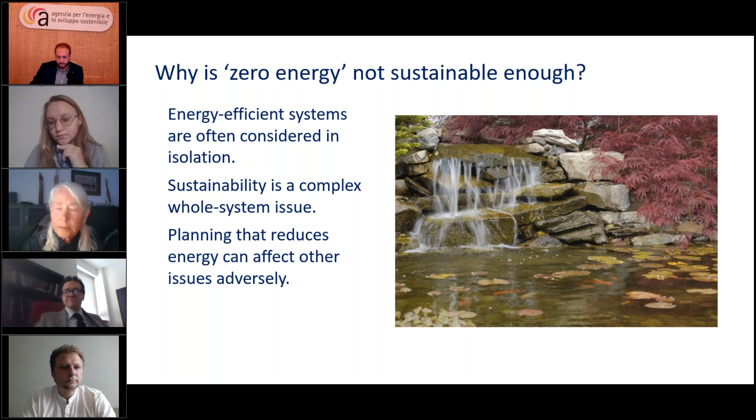I think we have a problem with your audio. Did you launch the recording, or are you trying to speak? Sorry. Can you stop that? We cannot hear. We're going to launch it. No, we cannot hear. Okay, I thought that would work better. I'll see if I can.

I'm going to talk about what I mean by beyond positive energy districts.

Some recent zero energy district plans seem to focus on energy in isolation. Single function planning can lead to bad decisions and designs if they do not recognize interdependency and potential design synergies. For instance, an energy or carbon positive urban district could still be lacking in environmental and life quality, social opportunity, or even direct access to the means of survival.

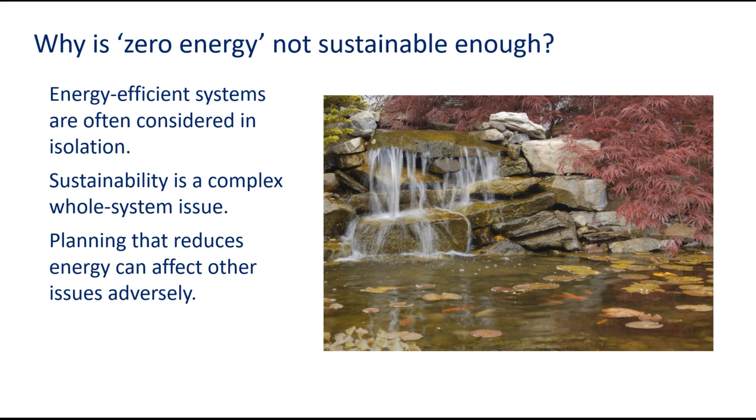Efficient energy systems can have harmful sustainability impacts. Even renewable energy could reduce sustainability by discouraging passive design or encouraging sprawl or over-densification.

We can do better. But today, planners are busy trying to respond to problems created by past planning policies, acts, and omissions. For instance, cities once designed for the convenience of cars created huge sustainability problems. But the equally car-driven strategy of just making cities inconvenient for cars created other problems.

If we cannot provide public transport, perhaps instead of just reducing the number of parking spaces, we could design multiple uses of spaces that produce energy and other public functions and benefits.

So it's not enough to mitigate the threats planners and politicians created, such as resource depletion, climate change, sea level rise, urban congestion, and expansion. Planning should proactively increase the social and ecological life support systems.

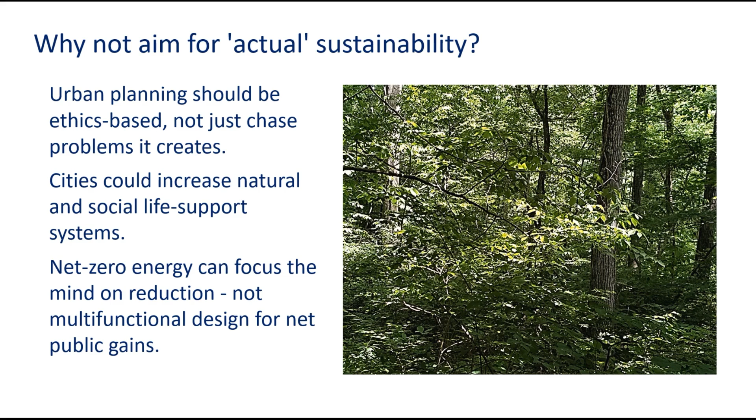Concepts like net zero energy and carbon focus the mind on reduction. Development must also create multiple positive public gains to even begin to compensate for their unavoidable land use, material flows, and pollution, until we learn to design net positive cities.

We need to revisit sustainability. The term has continually been watered down. Early international declarations often included the idea of proactively keeping future options open. That meant avoiding irreversible pathways such as nuclear waste, deforestation, or other forms of ecocide.

There was backlash in the 1970s to limits to growth arguments. However, after the seminal Brundtland Report of 1987, the technocratic professions, industry, and government bureaucracies adopted this view. So when they captured sustainability, the term was weakened to mean just lasting longer.

We're still talking about allowing growth up to its ultimate limits or negative tipping points, like increasing temperatures by 1.5 degrees or exploiting only two-thirds of the Earth.

Cities can solve many sustainability problems. Positive development theory argues that built environment planning and design can increase our natural and social life support systems in real terms, beyond zero. Planners have always been concerned with sustainability, but most have only very recently included nature along with

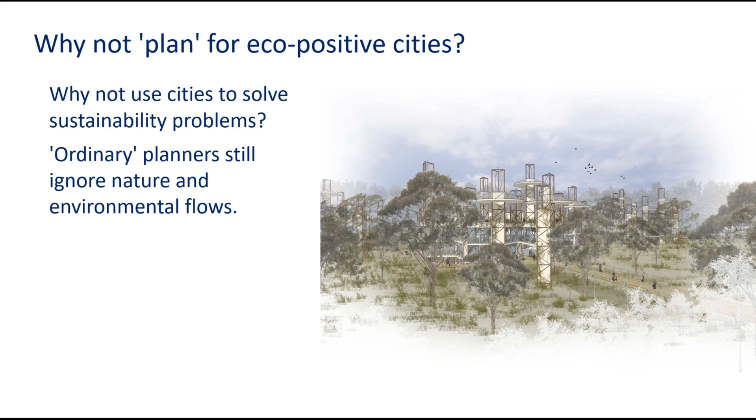human-centered environmental, economic, and social issues. For instance, past sustainability plans often only concern water flowing into and out of their district boundaries, not the whole river system or catchment.

So-called sustainability plans perpetuate ecologically harmful development patterns by focusing on just energy and short-term economics. For example, urban densification can save energy, but overly dense cities are hard to retrofit for climate mitigation, renewable energy systems, or new technologies like airborne taxis, let alone basic human needs such as environmental security, water, oxygen, contact with nature, things that are often left to the market.

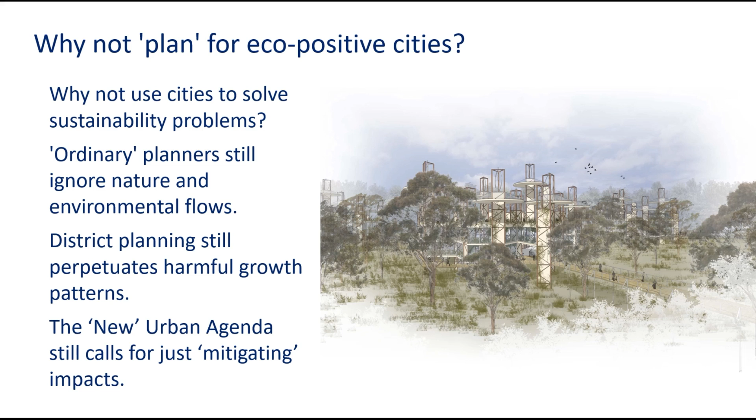The recent international effort, the New Urban Agenda, had nothing new in it and called for more sensitive urban growth through both urban densification and expansion. Reducing impacts on nature, or even restoring nature, is not increasing nature.

Why not use structures and buildings to solve, not just create, problems? Green design in the 1970s was about creating healthy, passive solar, low-impact, and nature-friendly environments. However, the aim was mainly energy and resource autonomy, not meeting public needs and benefits.

Then, when the Green Building Councils emerged in the 1990s, the focus became limited to efficiency, reducing waste energy and materials to save developers money. But this did not save nature or build community. It may have been necessary back then, but the efficiency standards remained largely relative to bad buildings.

Gradually, green buildings became associated with efficient but mechanistic, reductionist, or technocratic design. Consequently, new terms were used to reclaim sustainable design, like regenerative. Resilience, or the ability to recover through restoration, revitalization, and regeneration, ignores the global decline of justice in nature, so green design is unsustainable. So far, green buildings have had a huge opportunity cost.

Both planners and designers have left problems of social inequities and nature destruction to politicians and others, so what could go wrong? Most green buildings leave the poor and nature worse off than no building at all.

The damage that both ordinary and green buildings do will last for decades. Sustainability will require that green buildings be retrofitted to a genuine sustainability standard. However, since most buildings are not designed for adaptability, they'll cost too much more to upgrade.

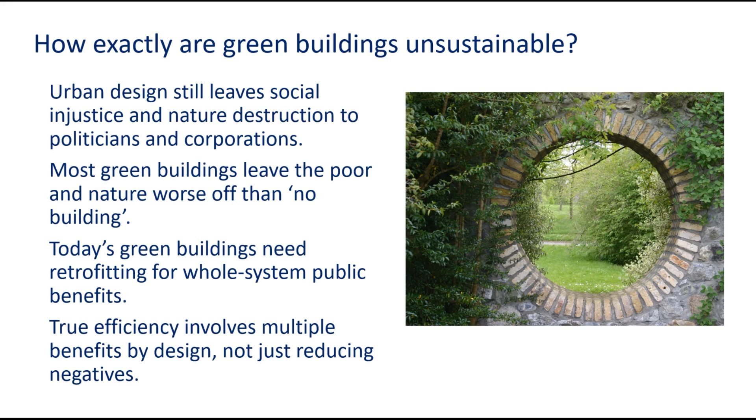Biophysical structures must be net positive to compensate for past errors. Net positive outcomes means going beyond negative system boundaries like property lines, tipping points, legal liability, or even supply chains. People now recognize that buildings impact every sustainability issue. They drive material flows and impacts in myriad other industries. Therefore, despite their humongous material flows, cities and buildings could have positive system-wide impacts, not just help us screech to a halt at the cliff edge.

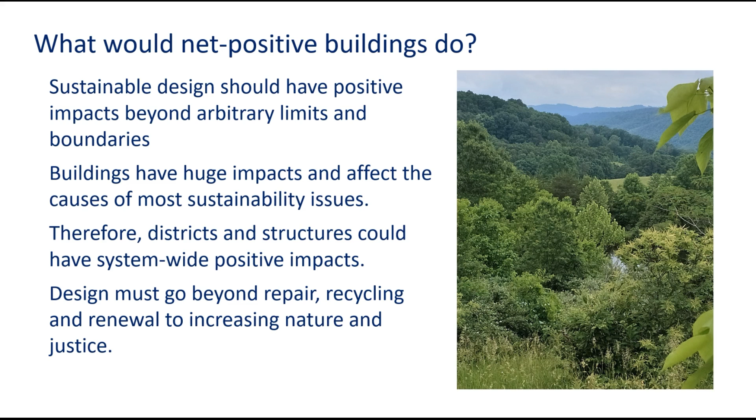But we need to go beyond repair and renewal to actually increasing nature and justice. Is this happening? Many big companies are now advertising nature-positive goals. That includes impacts on nature, not just resources. Many developers and manufacturers now recognize that sustainable design can save resources and restore on-site nature and protect occupant health while costing less. However, although many use life cycle assessment and count supply chain impacts on nature, they largely only aim to restore the damage that they themselves are adding.

Designs that are eco-efficient by using minimal energy and resources, or eco-effective by closing resource loops, or even nature-positive by restoration or offsetting, are usually only circular. Circular systems will be more economic, but in the global context of accelerating disparities of wealth and biodiversity losses, they're only remedial. That is, reduction, recycling, regeneration, renewal, and other actions to increase nature's resilience to assault are essential, but not net positive. Sustainability is a design problem.

Sustainability requires multiplying positives by design, not just deducting negatives. So sustainability is too important to be left to politicians, corporations, markets, or even demonstrators. Each can do their bit, but they'll never do enough. Sustainability does not require financial or personal sacrifice, but current power-based decision systems are geared towards sacrificing the underprivileged and ecosystems. So systems redesign is necessary.

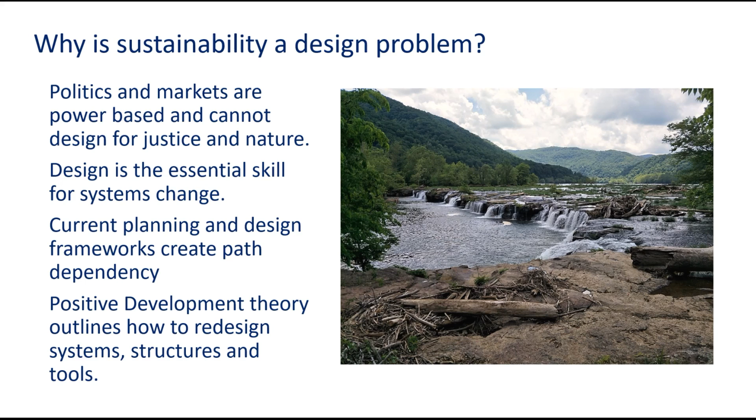Positive development theory outlines why and how to restructure institutional, intellectual, and physical systems to support net positive sustainability, so it turns the existing models, methods, metrics, and mindsets into sustainable design on their heads.

So net positive means more than recovery, renewal, and resilience. It means increasing nature, not just greening the spaces left over after development, and increasing environmental security and equal opportunity, not just privatizing public resources and nature in mansions or luxury goods more efficiently. The word net signifies a whole system global framework, not just outcomes within arbitrary limits such as building, site, or district boundaries. If people keep changing the meaning and standards of net positive to mean just better than the norm, then there will be no word for genuine sustainability.

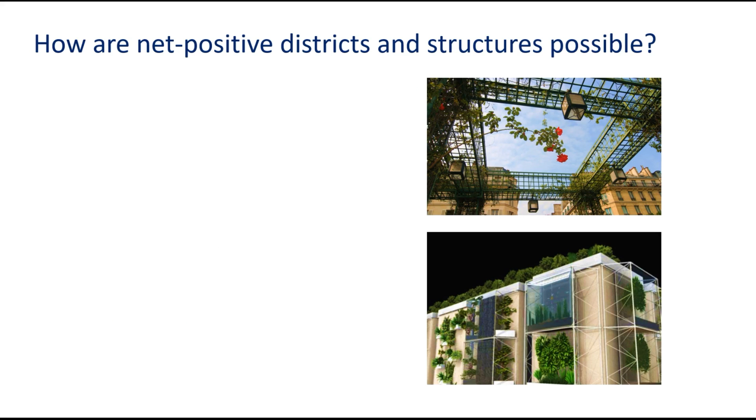Merely regenerating the remnants of nature, making nature more resilient, or making building stakeholders happier and healthier will barely slow down the rate of planetary destruction. Buildings are composed of manufactured products that, until recently at least, were almost never net zero, so it's hard to imagine net positive. But many forget that buildings have a spatial dimension.

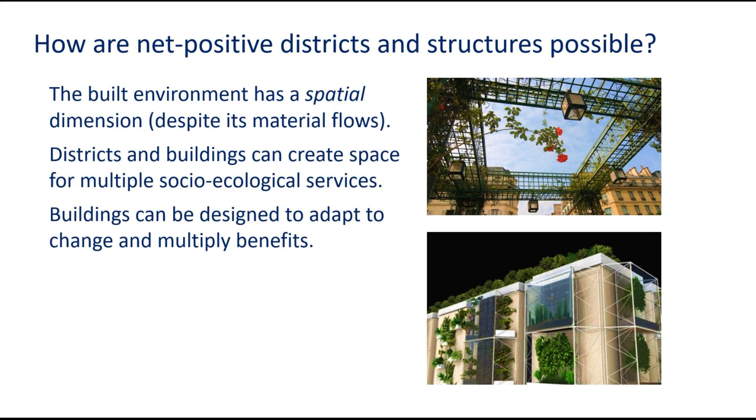Urban structures can create space for social interaction, multi-purpose shelters, biodiversity incubators, natural passive systems, and other things that in combination can create net gains. Multifunctional spaces and structures can be designed to adapt to social and technical change, such as using modular systems. They can increase future survival options and opportunities through diversity.

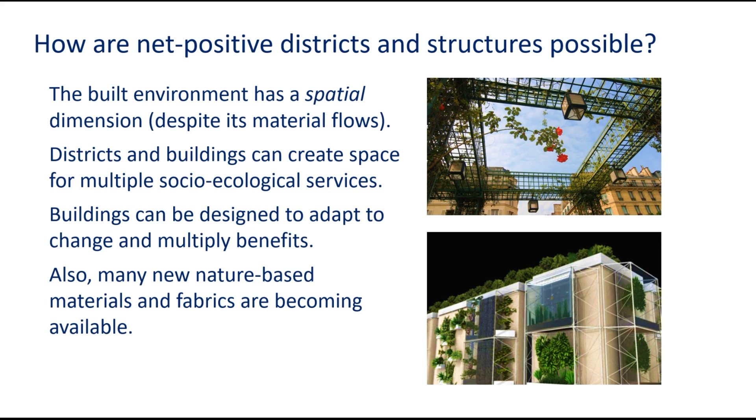But new construction and furnishing materials are also available. 3D printed buildings could, for instance, use hempcrete, bamboo, or local agri-waste. But mycelium-based bricks and boards do not take as much land to grow. And fabrics for curtains, furniture, and carpets, and even building energy could be produced by algae-based systems.

Net positive buildings can blend in with any ecosystem or cultural tradition, just like passive solar design can, or it can be largely invisible. Metaphors help the imagination, so you could reconceive cities and districts as like reefs in an ocean that nurture and reseed their bioregions. Buildings could be reconceived as garden resorts for everyone, that is, gardens for living instead of machines for living.

No projects are certifiably net positive because the claims are not properly assessed, but some projects are currently being assessed with the Net Positive Design app, which I'll discuss soon.

So what would the test of a positive development be? Well, it must benefit society and nature in real terms. Therefore, it would measurably increase the ecological base, or be nature positive, increase the public estate, or be socially positive, and increase future options and opportunities. But moreover, if possible, development should overcompensate for its share of existing negative regional or district social conditions beyond its own impacts.

So let's look at what constitutes beyond a project's own ecological, social, and economic impacts. Ecologically, net positive design would increase nature beyond pre-urban or pre-industrial conditions for genuine security as well as life quality. That means not merely regenerating what's left on site or offsetting it by preserving what's left over elsewhere or conserving a fraction of the earth.

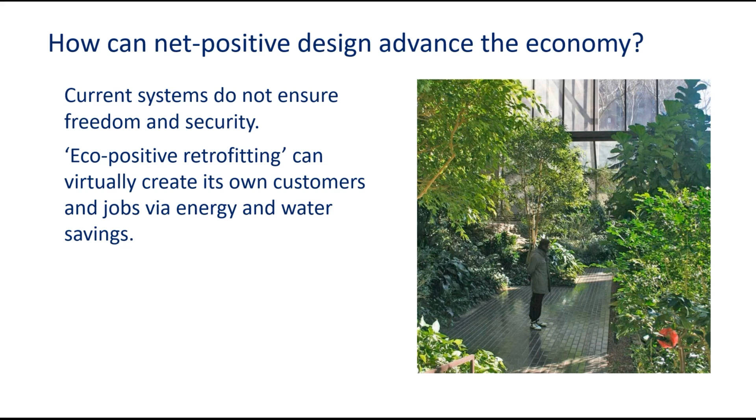Emergency shelters, vertical urban farms, community recreation facilities, and so on can be designed to provide multiple public functions and services.

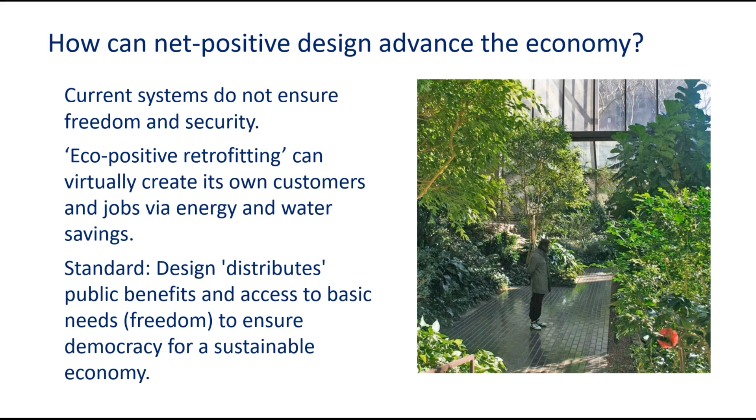So the standard is design that distributes public benefits for economic efficiency and access to basic needs for freedom to ensure democracy, which a sustainable economy requires.

So in summary, the logic behind positive development is in part that sustainability requires environmental justice, equal opportunity, and nature. It requires a different open system design paradigm based on a new sustainability theory and practice, which entails new intellectual concepts and frameworks, and requires the integration of decision-making with design, which requires the redesign of systems of governance.

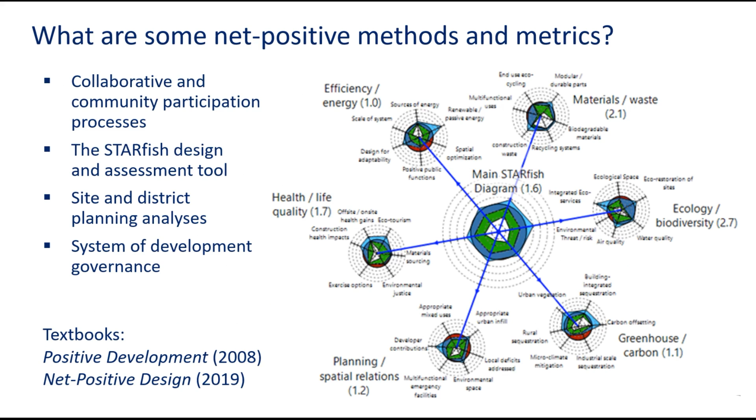By governance, I mean checks and balances to prevent the abuse of power. So we need to design checks and balances between corporations and government. Positive planning and design processes and tools are summarized in two textbooks, Positive Development 2008 and Net-Positive Design in 2019.

The free Net Positive Design app called Starfish is unlike other tools. For instance, it calculates remote and cumulative impacts in real time as the design evolves. The tool has embedded instructions, as does the book, website, and video, and one can ask questions about how to use it on the website.

24 major differences between the Starfish and green building rating tools are explained on the website and publications. For instance, Starfish sets benchmarks relative to genuine sustainability, whereas most tools only assess improvements over typical buildings, practices, or site conditions, which is the distance from unsustainability.

Tools do not measure beyond zero, so net positive impacts aren't really assessed or measured, although some tools cheat and count reductions in negative impacts as positive. The Starfish distinguishes ecological environmental impacts, whereas many tools give ecological points for less bad indoor environments.

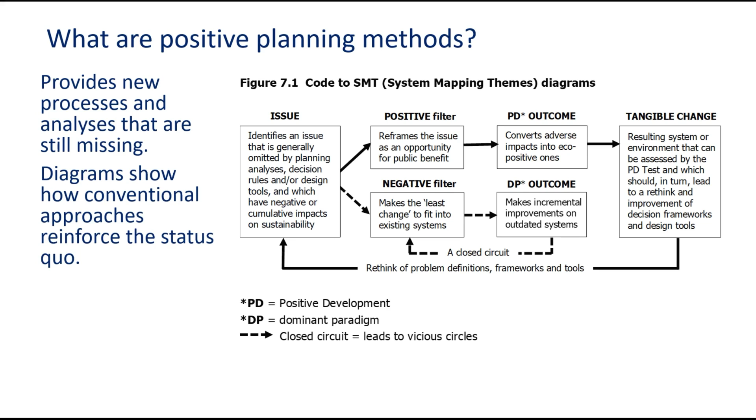New planning methods include genuinely participatory sustainability processes and a set of planning analyses for urban design that are still missing from both theory and practice. These diagrams that accompany the text suggest how conventional approaches reinforce the status quo. These analyses, depending on project size, can be conducted as a simple community mind mapping exercise or as big data analyses by experts. These analyses will be included in the STARfish tool as a satellite diagram or a standalone diagram to guide net positive planning.

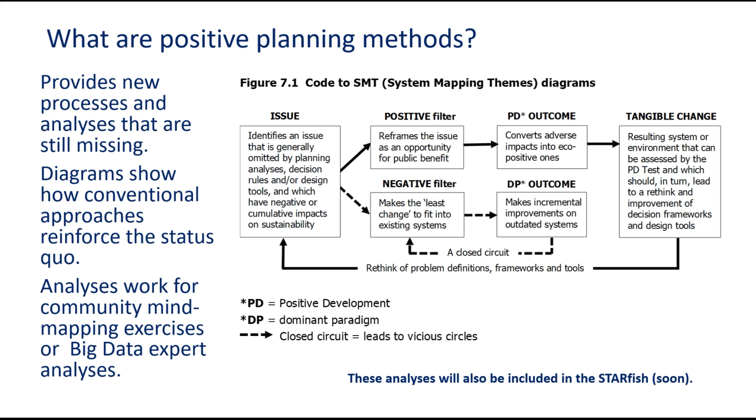I'll only have time to show the outline, but I'll put a video summary on the website for those too busy to read. Some of these analyses concern energy systems, but they focus on how these systems can increase sustainability values, such as human rights, security, and freedom.

These analyses concern different stages of the design and planning process, and I've simply given them all names and initials. These are issues at the building or project scale, urban planning at district or regional scales, decision-making at the development scale, and governance at regional and national scale.

So I'll stop here for questions. Thank you, and you're all welcome to contact me for further information.

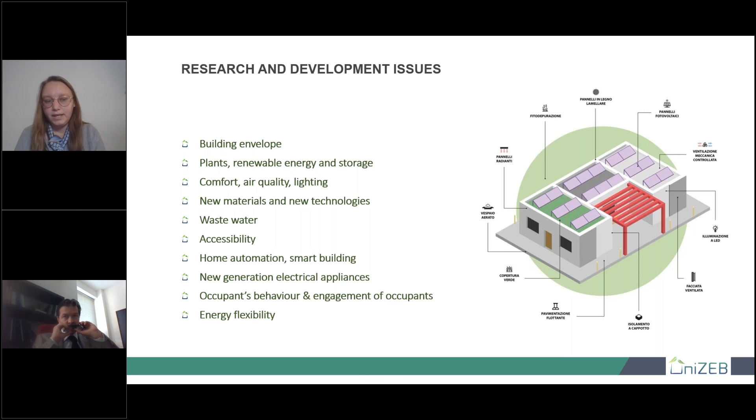Because of this, our research is about the building envelope, the plants for renewable energy and storage, comfort, air quality, lighting, new materials and new technologies, wastewater, accessibility, home automation, smart building, new generation of electrical appliances, occupants' behavior and engagement. In this building, some students will live, so we can understand how people interact with these technologies, or how they can live in a sustainable way. Last but not least, we are going to study the energy flexibility.

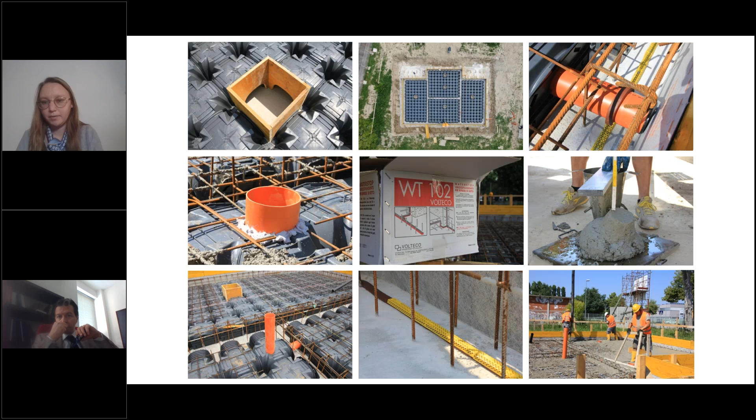These are some photos of the construction of the platform, but to understand every part of this process, I'm going to show you a video of this part.

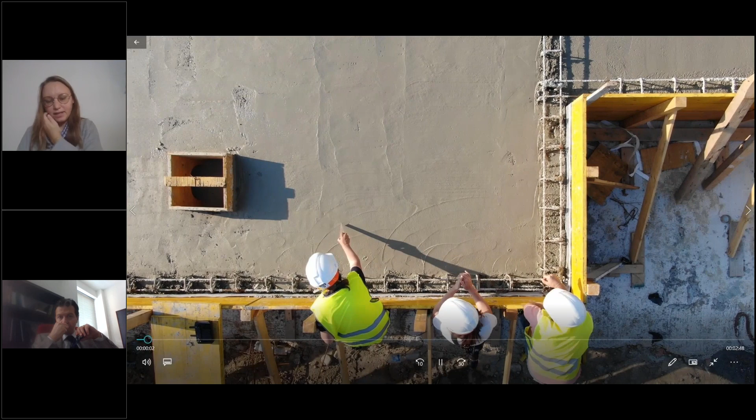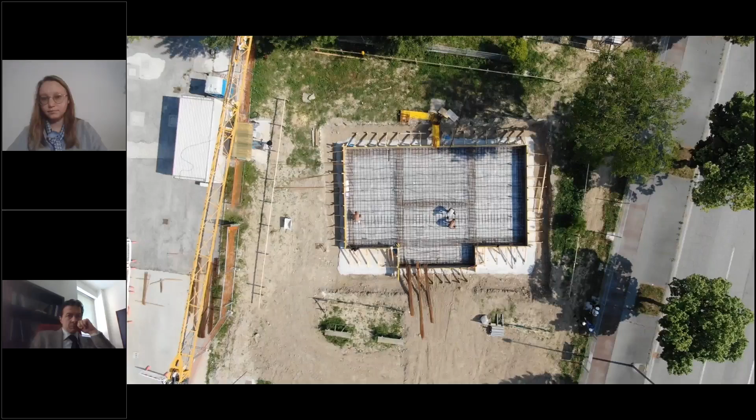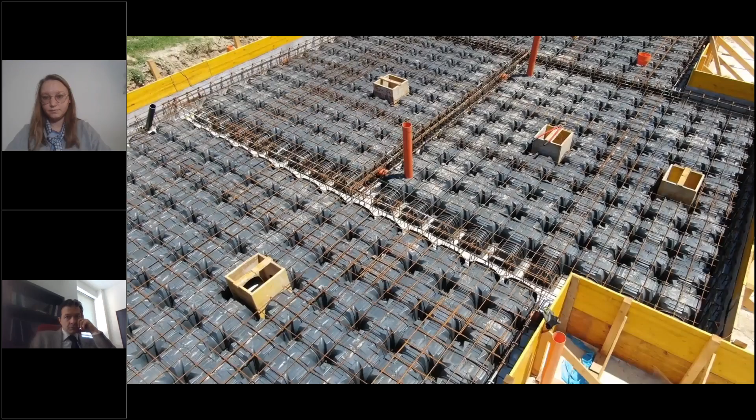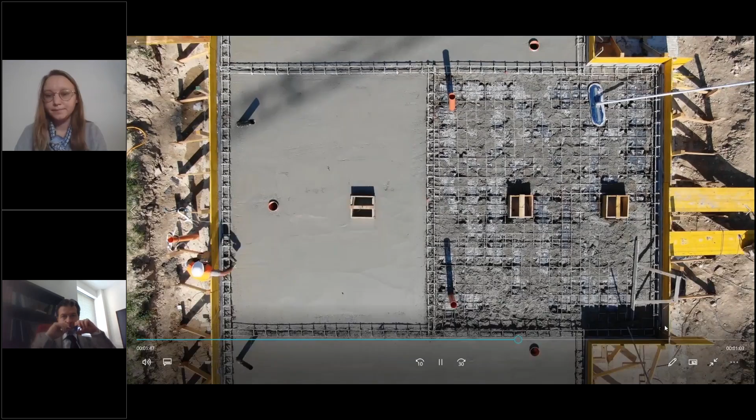Let me see if you can hear. Okay, just a few seconds and I can.

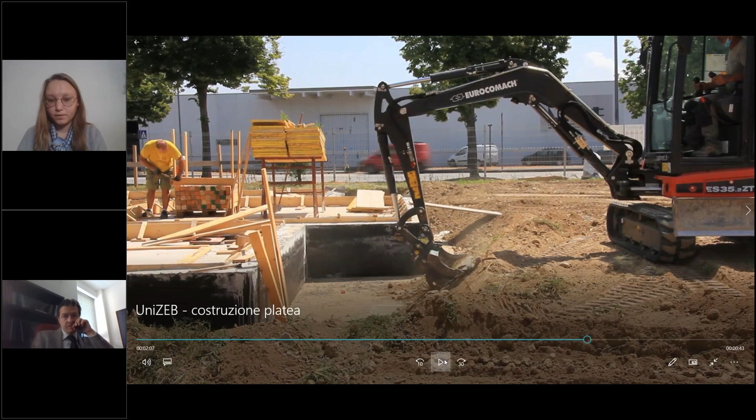This is the result of our construction. So, but nowadays, I want to show you only a few seconds of the result of today.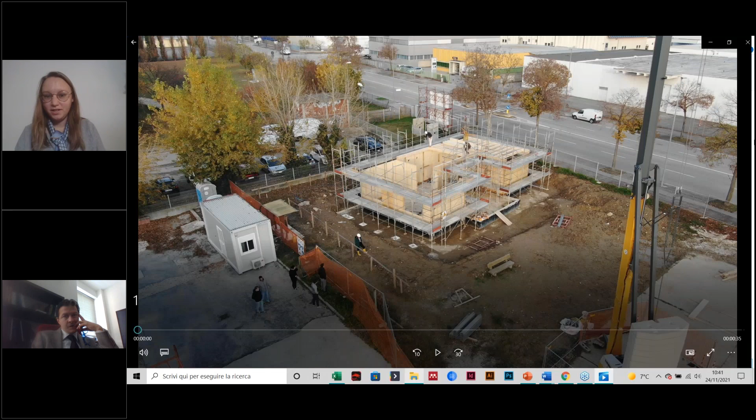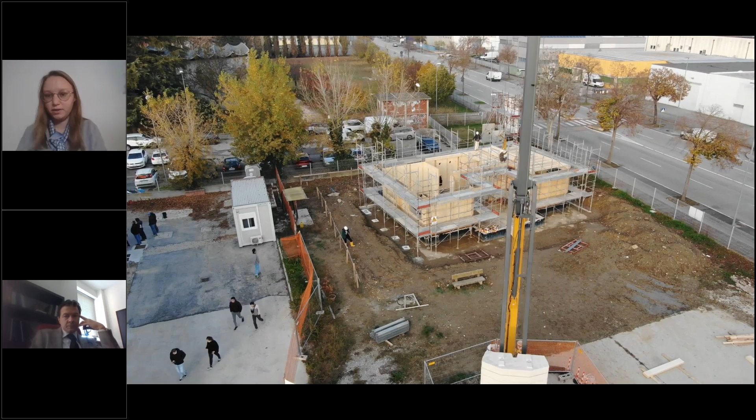Now we are here with the walls already constructed. So next week we are going to put in the installation of the house. It's going to be a special moment for us.

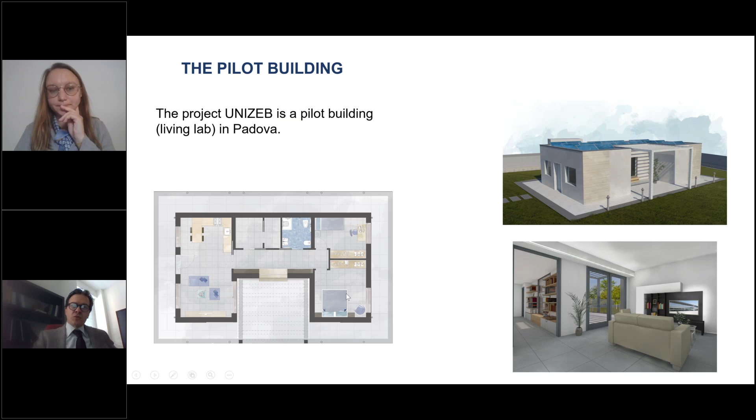Now, the building, as has been shown by Melissa, is very simple. It's about 80 square meters. We have a living room, technical rooms, a bathroom, then a single room and a double room where the students will live. The building is equipped with, for the heating and cooling system, a radiant ceiling. We have a ground source heat pump.

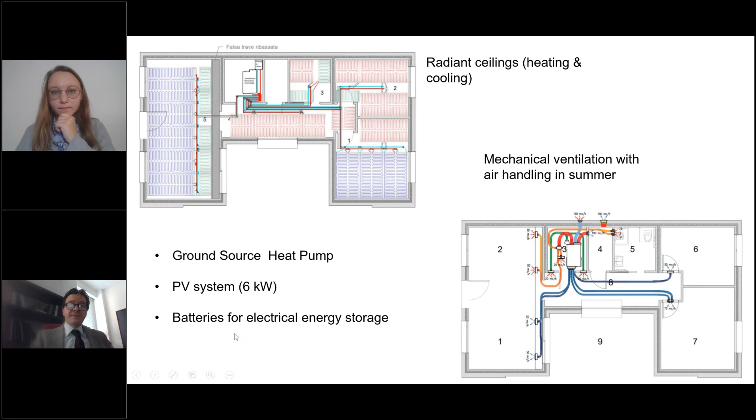And we have the mechanical ventilation system, which is also handling the air in summertime in order to decrease the level of humidity of the air, which in summer is quite high here in the Po Valley. We have a photovoltaic system to provide renewable energy, and we have also batteries for electrical energy storage.

Of course, when we talk about green buildings, we are not talking only about energy, but we are looking at some other sustainability issues. As you have seen from the picture, the structure is wooden construction. We are also looking at the water management and the phytoremediation plant.

We have rainwater management. We have a domotic system where we are going to look at potential solutions to make the building more flexible. We have sensor meters and building automation for doing that, connected with the KNX protocol. And as already said by Milica, we have three types of roofs: green roof, gravel, and raised floor.

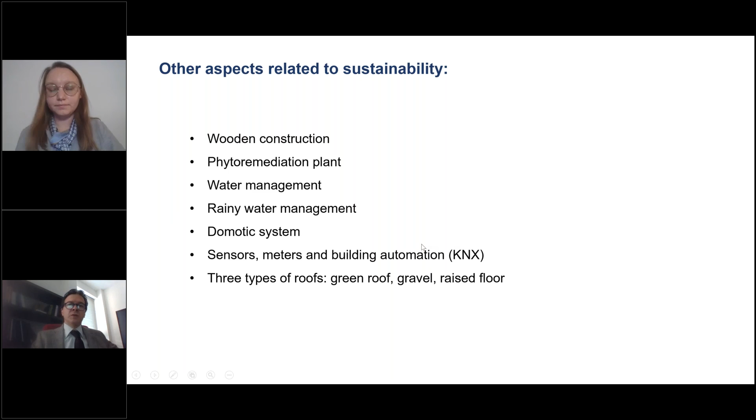And we will make a monitoring activity. The monitoring activity will be quite strong in terms of energy performance, indoor air quality, comfort performance, and also on the envelopes - the vertical envelope and the roofs. The building is a zero energy building, hopefully positive building.

We made a first estimation of the consumption of the building. In principle, it should be a positive energy building. These are the energy analysis for the building month by month, and here you can see the electrical energy.

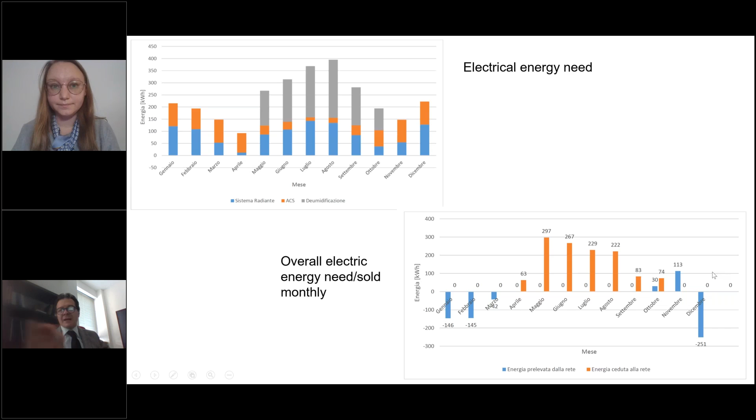As you can see, during the winter months, which are of course less sunny and more cloudy, we are going to buy some electricity from the grid. During the summer season, we are going to produce more electrical energy than we consume, and again in the last months of the year, we are going to require more electricity from the grid than we produce. So overall, making a yearly balance, the balance should be positive based on our calculation.

Of course, what we are doing so far is to set up this laboratory. So we are building from zero the laboratory, and we are going to set up the first pilot building, where we are going to make the measurements or monitoring activity between the end of next year, 2022 and 2023.

And the idea is that when we finish one year of monitoring activity, then we are going to set up a new prototype - or let's say we will remove some parts of the building and install new features, new systems, in order to make a new monitoring activity in the following year. So the idea is to make a sort of continuous laboratory where we are going to do research activity and also, as I told you, teaching activity, educational activity, and technology transfer. So this is the basic idea of UNIZEB.

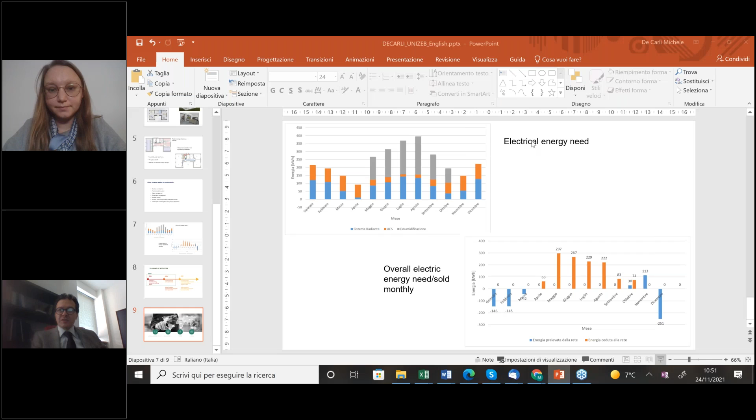Marco, are you here? Hello, can you hear me? Yes, yes. Good. Thank you very much for your presentation.

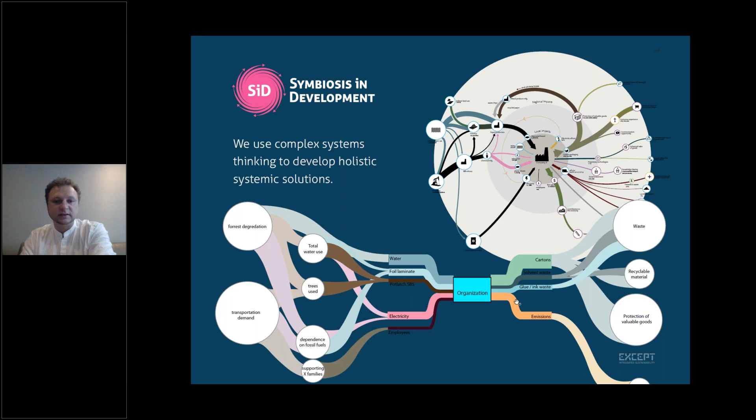As well as a presentation at the beginning of the conference about the importance of looking at an integrated perspective when we look at the built environment, we also take along all aspects such as not just energy and material concerns, also ecosystems, the economy, cultural aspects, social aspects such as happiness and health, education, and integrate that into a single approach.

In case anyone is interested, SID has been developed for about 20 years. There's a lot of free videos, and the book that was written, Omnibus, is also free, that you can download from thinksid.org if you would like.

So let me go to some case studies. I'll quickly show you two separate ones and then go a little bit more in depth about Orchid City.

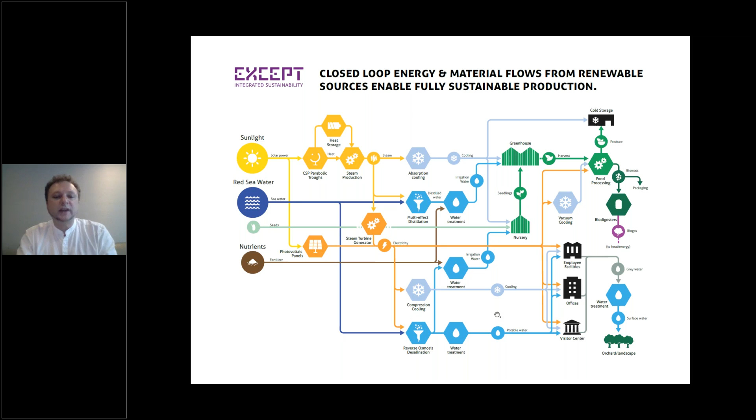And this system consists of, here you can see kind of like a flow diagram. It gives you a bit of an indication of the complexity of the system, while each individual module here is a readily available technology. The way that they are connected and hooked up to each other is really quite innovative. And what we're really trying to achieve here is not so much developing a new technology or a new factory or something to offset an already existing food supply chain.

What really is happening here, as I can show you, is we are actually completely changing the supply chain that is feeding these arid countries. As you are aware, most of the fresh food that is available in these countries comes in through cooled air freight—Boeing jumbo jets flying daily to and from places such as Spain or the Netherlands to provide them with tomatoes and zucchinis and salads and so on. So the impact really lies in that air travel and that cooled transport. And while the food arrives, it's no longer very fresh, and the prices are also very high, so that it is not readily available for all layers within society.

So what we're really doing here is we have a 99.9% of CO2 savings, which we then offset to make entirely positive by generating more power than we need and using only salt water to produce the food in question.

So over the past 22 years, we have been developing all of these different projects to try to move the performance level of a realistically achievable, sustainable society. Now, about 2 years ago, we started to put together all of these different ingredients into one model for what we would call building a future city today.

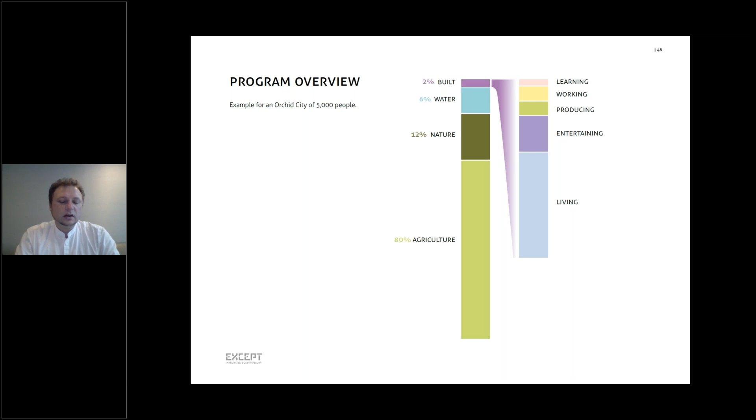In the program, what that results as, if you start modeling this and the requirements that you would need to feed and power such a city, you arrive at something like this. You arrive at a footprint that requires about 80% regenerative agriculture, 12% rewilded nature, a fair component of water, and only 2% would be built up.

In the energy material resources, we have a completely closed system that mostly relies on ecosystem services. So the agriculture is tightly connected to the energy and the water system, which is then also integrated using the waste cycles in order to be entirely self-sufficient.

And by doing so, for example, we can use biodigesters to create biogas that can be used to generate electricity and heat in a way that would otherwise not be feasible, and that offsets the need for battery systems to store electricity when there is peak power available.

And these kinds of smart combinations of an integrated way of looking, and then integrating that with the socially activated and equitable system, will result in an Orchid City model.

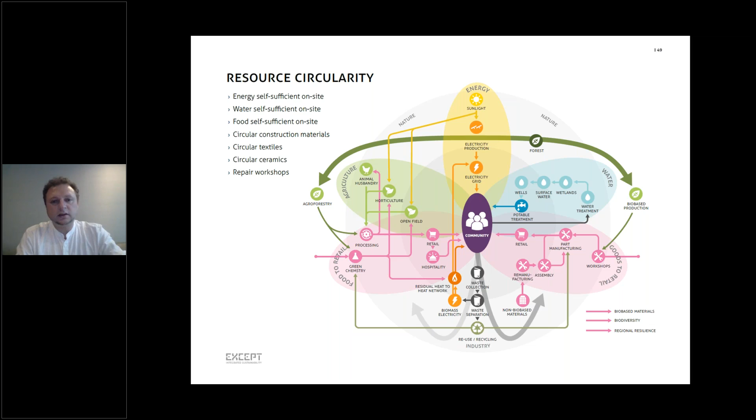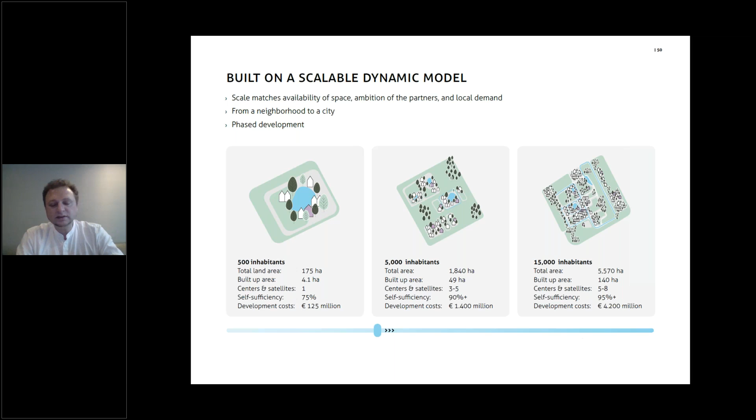The model that we've created can range from about 500 inhabitants to 15 or even 50,000 inhabitants. So the models allow us to scale and step and to quickly develop new master plans for different locations that then integrated regenerative nature and food production as one of its core components.

Really, the entire area is powered by the land that it exists on and the ecosystems that have been managed there. We are spending a lot of time on creating the social and health and happiness systems that are allowed to connect people amongst each other, including cross-generational connection, so that the elderly population can have a useful function connected to the rest of society, and to include those life patterns as they change.

Also, in case of work, the projects are job neutral. That means they provide as many jobs as there would normally be a requirement for. Not everyone that lives in those neighborhoods would work there, and not everyone that works there would live there, but it is job neutral in a sense that it can completely revitalize shrinking regional systems we're seeing all over the world, and counteract the increased urbanization we're seeing, especially in developing countries.

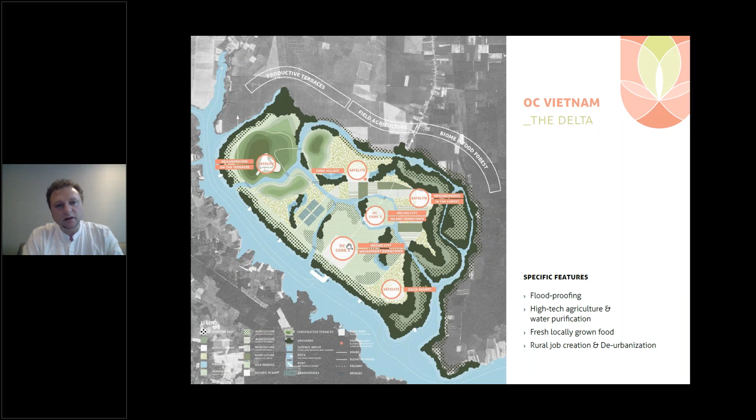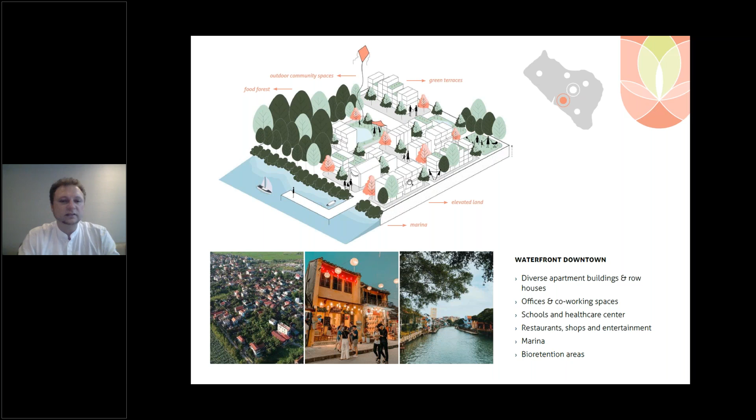At the same time, we're distributing these services so that all weekly services are available within each satellite, and monthly services are available within the cores. Here we're seeing a picture of a higher density core, where different layers of housing are intermixed in a more urban environment, pit against the lower density urban agricultural areas on the outskirts.

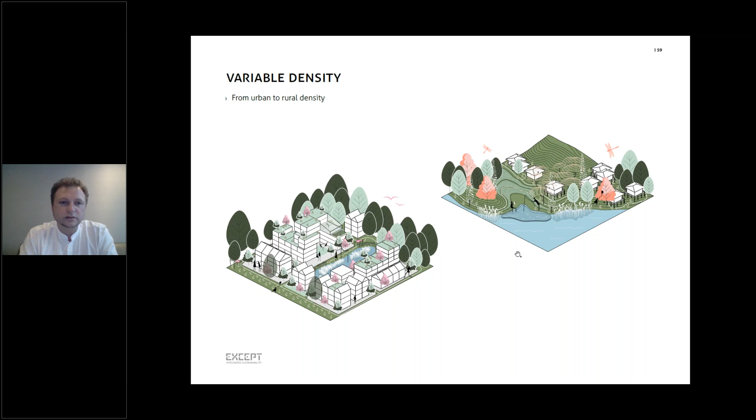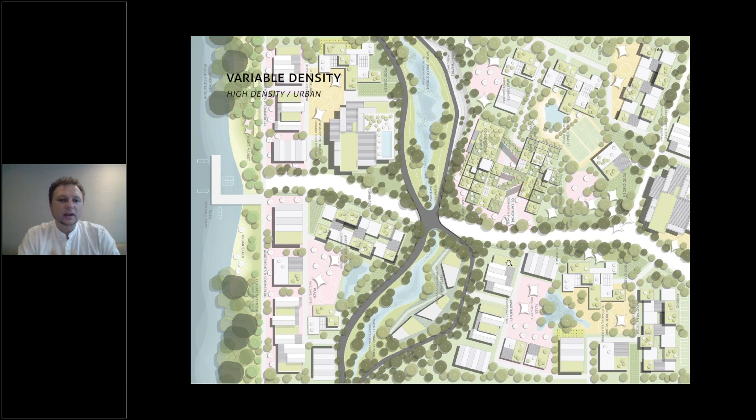Here you can see some of the master plans we're working on for higher density, completely interwoven with ecosystem services and water in entirely walkable neighborhoods, where a high variety of diversity in buildings, landscape, and program allows these to be very dynamic places, also within a 5-minute walking distance from all your essential needs.

Here's some more pictures. I love this one, because it really shows that the water looks like a lovely place to be, but what it really is in this case is a distribution conduit for the agricultural systems. It's a water purification system using phytoremediation connected to it. It can raise and lower depending on different climate situations, so it's also a stormwater buffer and drain, and it can be used for recreation and helps biodiversity.

So with that kind of element as an example, you can see how much value you can create when you really embrace that integrated approach, rather than just putting solar panels on roofs as an exaggerated example of the opposite.

So what we're able to do here in terms of climate change impact for an Orchid City of 50,000 people is save 140% of CO2 footprint per person, which means it offsets 40% of CO2 of people not living in the city. So we're having a climate positive effect.

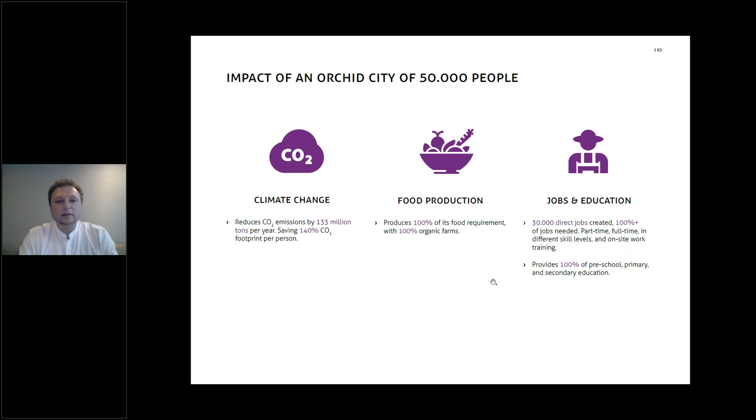We're producing all of its food requirement with organic farms. We're producing 100% of the jobs needed with 30,000 direct jobs created. We have the entirety of the schooling requirements present on site. We are contributing a huge amount to the local economy, also to be self-sustaining, and they are financially feasible and investable with an interesting rate of return that can allow for capital investment from traditional sources.

And we have land and water regeneration of a significant amount with the regenerative agriculture. Last but not least, we are aiming to restore beyond 100% of natural biodiversity, and we are also aiming for the projects to be built at dilapidated sites, either brownfields that have been polluted or degraded ecosystems that we can help recover. And that's the summary of Orchid City.

We are currently working on expanding our partnerships in various countries, really aimed at finding locations to build Orchid cities for around 50,000 people.

We are having our initial conversations now. So I'm also now in Vietnam to talk to some municipalities to find some locations. And then we hope within the next 2-3 years to have about 2 locations selected for which we will start the development plan.